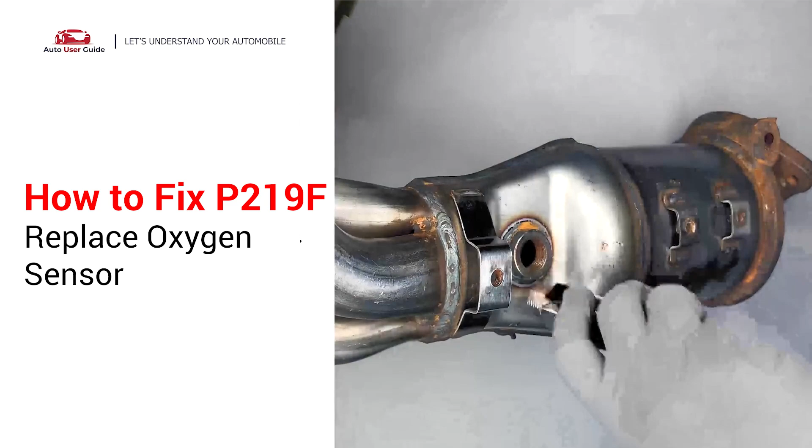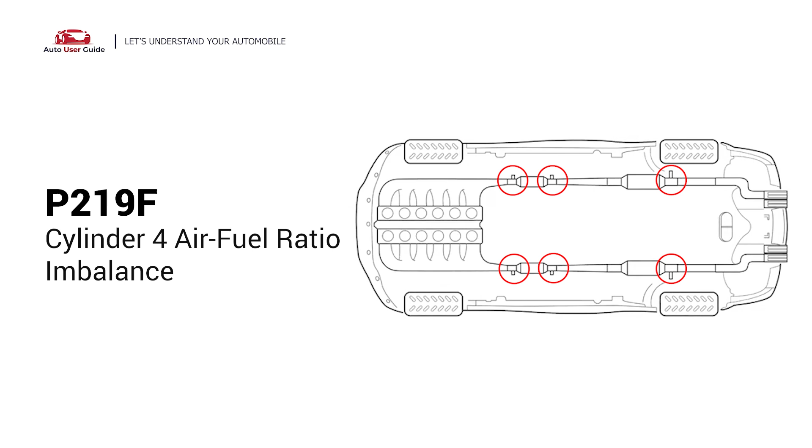By replacing the damaged oxygen sensor, you can easily fix P219F error code by yourself. This means that the PCM has detected the air-fuel mixture in the number 4 cylinder is significantly different from the other cylinders. Under this circumstance, short-distance driving is permitted, but your vehicle should be repaired as soon as possible.

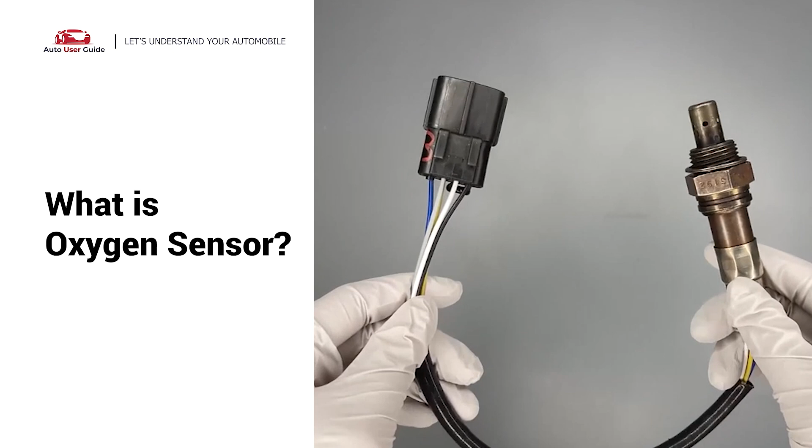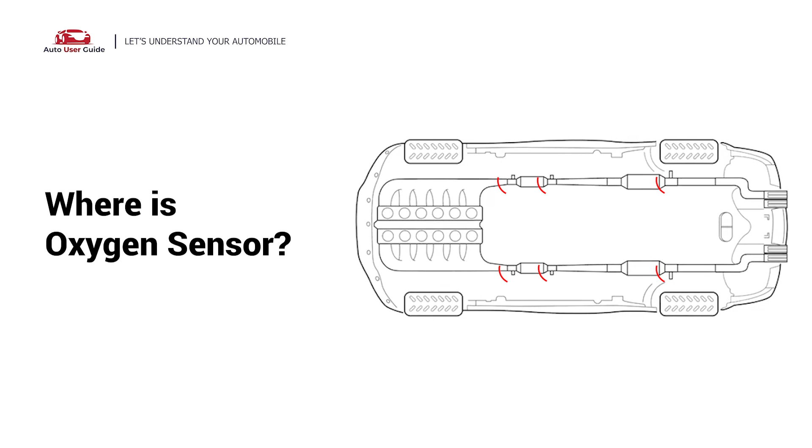Oxygen sensors, also known as O2 sensors, help determine whether the air-fuel ratio of combustion engines is rich or lean in real time. Oxygen sensors are located before and after the catalytic converter, and here are the sensor's locations.

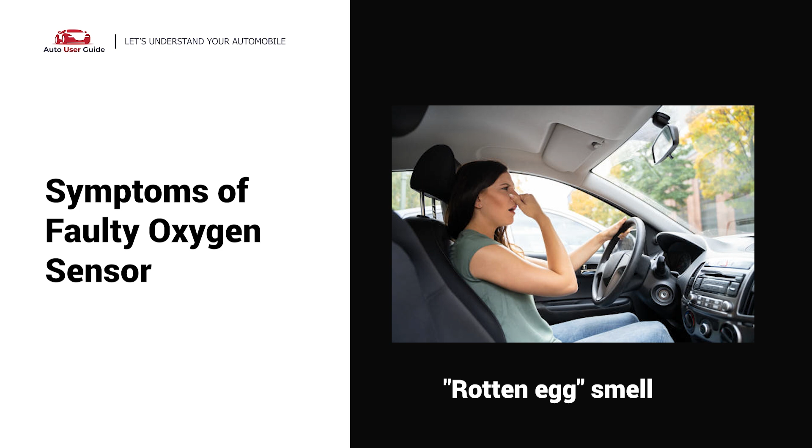A faulty oxygen sensor may cause black smoke to come out from the exhaust. You can notice fuel efficiency loss and a sulfur-like or rotten egg smell. Here are 2 methods to fix the oxygen sensor. Modify the oxygen sensor.

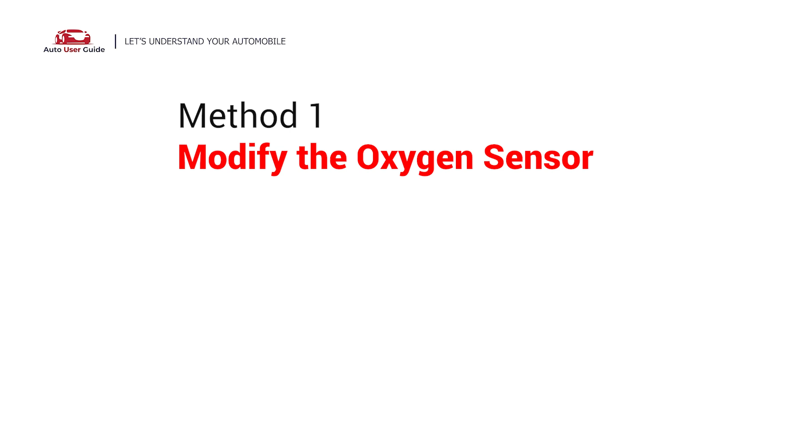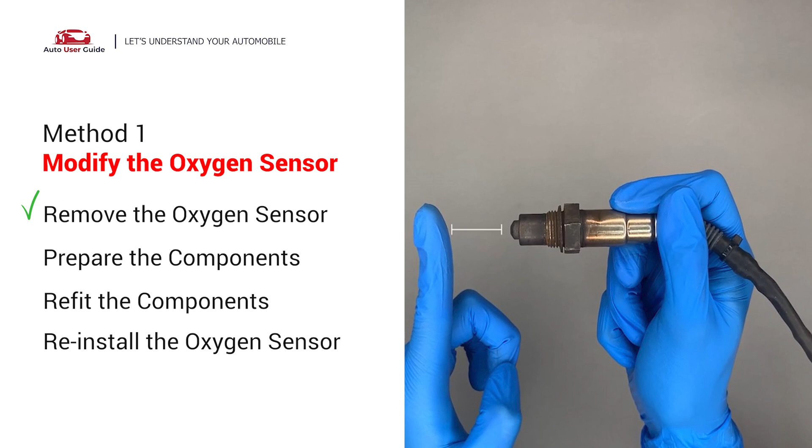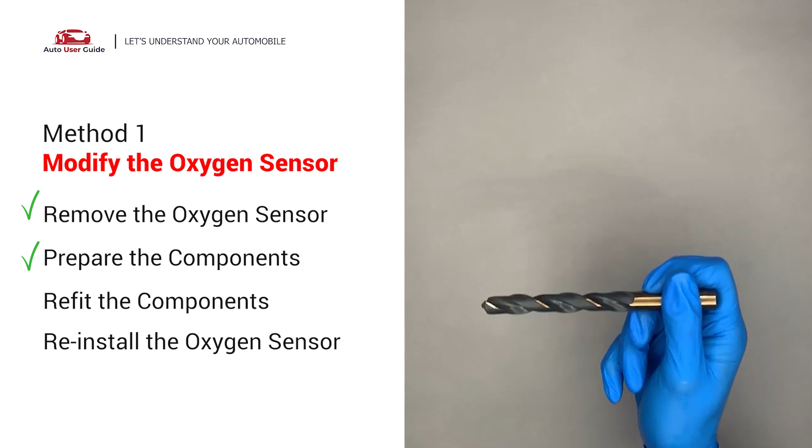You can remove the oxygen sensor from the converter and fix P219F by putting extra space between the sensor and the converter. Getting the spark plug non-fouler gives enough space to fit the oxygen sensor, and then use a 1/2-inch drill to refit it. By doing this, put them together and put back on the catalytic converter.

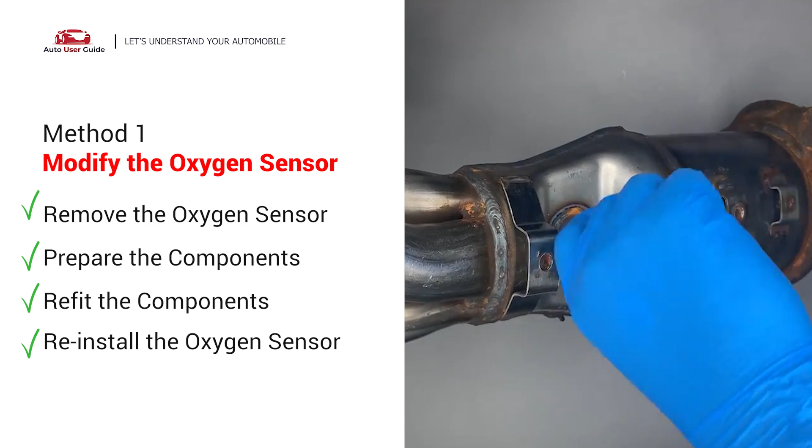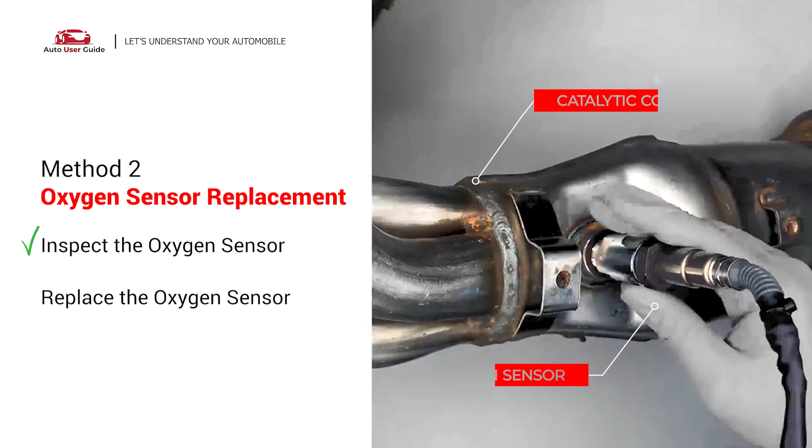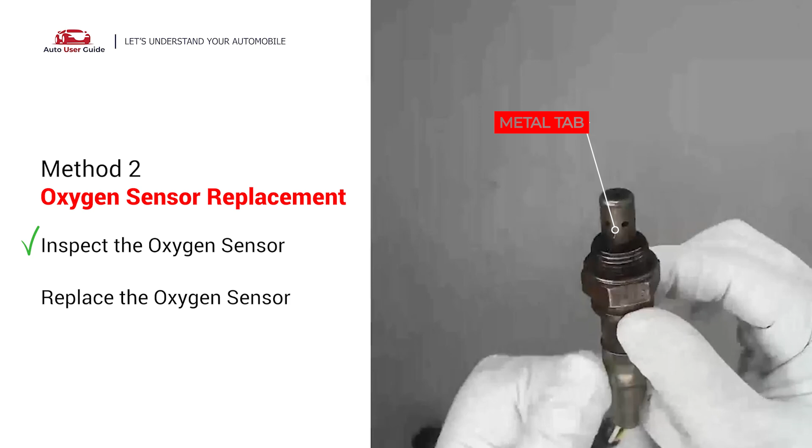Oxygen sensor replacement. Carefully remove the oxygen sensor from the catalytic converter and visually check the oxygen sensor electrical connections, wire harness, and metal tabs for any damages. If damages are found, then replace the oxygen sensor. So in this way, you can easily fix P219F error code.